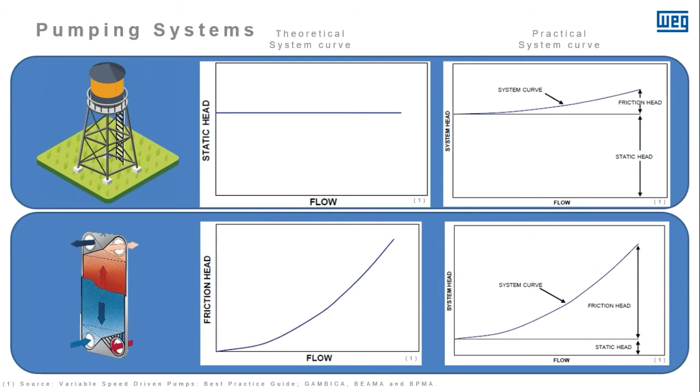And for a pumping system to work, we need to overcome the total system head of the system. And how do we do that? We do this with pumps. So I'm not going extensively here talking about pumps, but pumps are mainly divided into dynamic pumps or displacement pumps.

Dynamic pumps, there are also two groups: rotodynamic pumps, where we have the centrifugal pumps that we know a lot, but they also have some axial pumps and a mix of both. And of course, there are single-stage and multi-stage pumps, but we're not going into all these divisions. We also have special effect pumps that we call jet pumps or eductors.

And then we have displacement pumps, where we have reciprocating movements with plungers, pistons, or even diaphragm pumps. And then we have rotary pumps: progressive cavity for oil pumping, screw, gear, lobe, vane, peristaltic. We have a lot of variations.

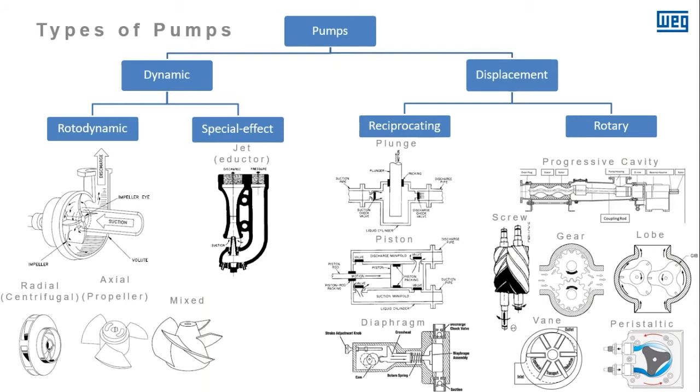Okay, talking about pumps and a little bit of differentiation between them. Let's just generalize here. We have centrifugal pumps, where usually we have this pump curve, with the head and flow graph here. The pump curve will look like this. And then we also have the diaphragm pump, a positive displacement pump, where we have head and flow like this.

Usually we also have this graph turned, with the flow on the y-axis and the head on the x-axis. But here for comparison, we will have it this way. In a pumping system, we will have the system curve and also the pump curve. Where those two curves intersect each other, we have the operating point of the pumping system.

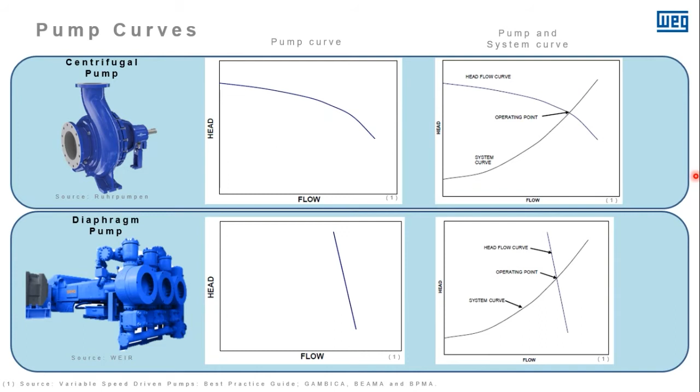Let's go to the life cycle cost analysis of a typical pumping system. I'm making an assumption here that we have possibly three types of people watching this webinar. We have the curious ones that are here just for the knowledge, we possibly have someone here with pumping systems with a lot of costs, and we possibly have someone here that works with pumps and perhaps wants a more economic solution to offer to their customers.

So let's analyze the life cycle cost of a total pumping system. Pumping systems usually work for 15 to 20 years. So initial costs are not a big part of the total costs. What we have mostly is energy costs during this life cycle. And we also have another big part here, which is maintenance costs, repair costs, and everything related to this.

So taking this into consideration, we should properly design the system in the beginning, perhaps investing a little bit more in the beginning to save more energy and to save on maintenance. So due to this, I'm going to divide this webinar into two main parts: the energy improvements and also the performance improvements that can help with maintenance.

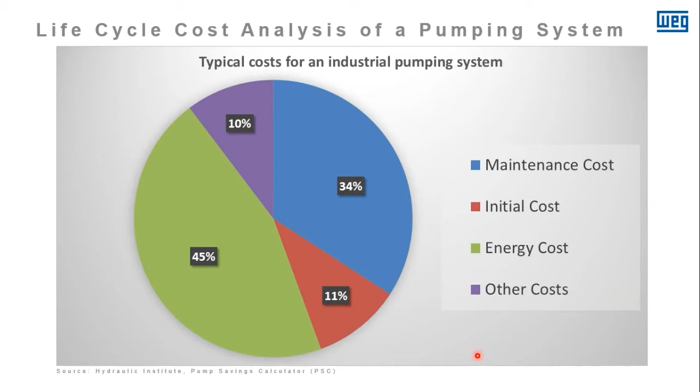Energy improvements are the most visible improvements that we can have in a pumping system by using variable speed drives. They are very tangible, and it's also easy to calculate how much you can save in energy by using variable speed drives, and that's why people mostly think of a variable speed drive as saving energy.

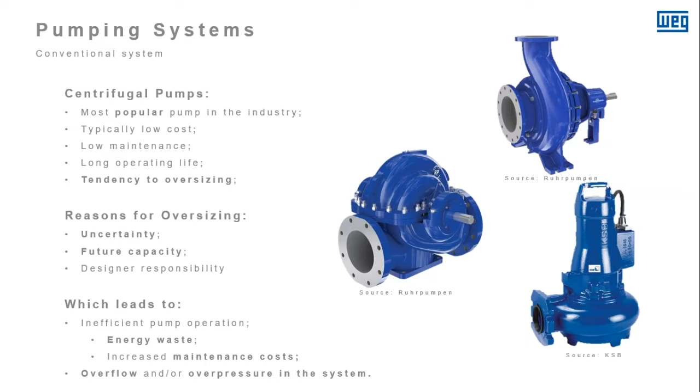So considering that centrifugal pumps are the most popular pumps in the industry, and that they have low cost, low maintenance, long operating life, and usually a tendency to be oversized, we face some problems here. Reasons for oversizing centrifugal pumps: the designers usually have uncertainty about how the system curve will be in the final assembly of the system. That's why you have to oversize the pumps a little bit. Sometimes you also consider some future capacity in the system.

And as the designers are responsible for this performance and have to endure the uncertainties of the system, they tend to oversize centrifugal pumps and other pumps as well, which leads to inefficient pump operation at the operating point. That leads to energy waste and increased maintenance cost. It also leads to overflow or overpressure in the system. And to control this in a conventional system, we use either bypass valves or throttle valves.

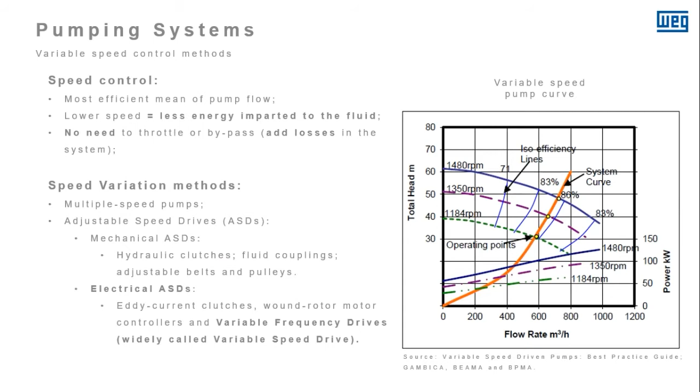Let's get into the variable speed drive. How does a variable speed drive work and how can it help in varying speed in a pumping system? So a variable speed drive is composed of three main parts. We have the rectifier bridge at the input, mostly a 6-diode rectifier bridge. We have the DC link with the DC capacitors, and we have the inverter part with the IGBTs.

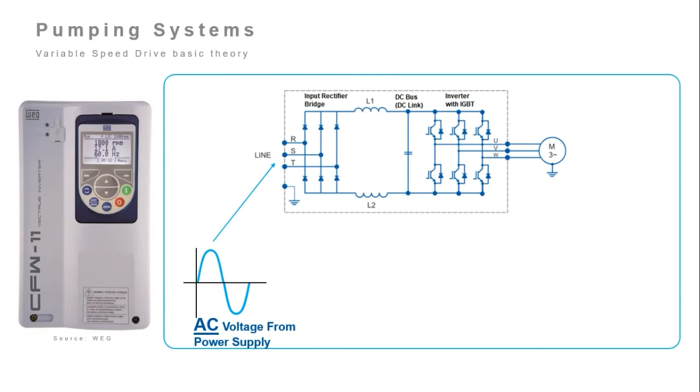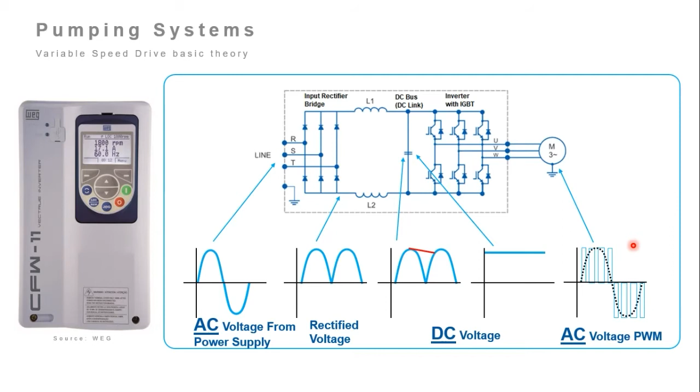So to start, we have the AC power supply going to the rectifier bridge. Then we rectify this, and also we have the capacitors to smooth this energy in this DC link. So having this DC voltage in the link, we can use the IGBTs to switch this energy and create a sinusoidal wave at the output. Variable speed drives consider a voltage by frequency curve always constant, which leads to constant torque in the motor. And by varying the frequency of this sinusoidal wave at the output, we can vary motor speed, always keeping the pumping system at the best efficiency point.

Another important point to mention is that the variable speed drive will usually control a pumping system automatically by using a PID controller. We can always monitor the process variable, which can be flow, pressure, or another variable. And then we can set a control point in the system. And by adding proportional, integral, and derivative gains, we adjust the output of the drive, consequently the motor and the pump, to change the speed and change the process variable.

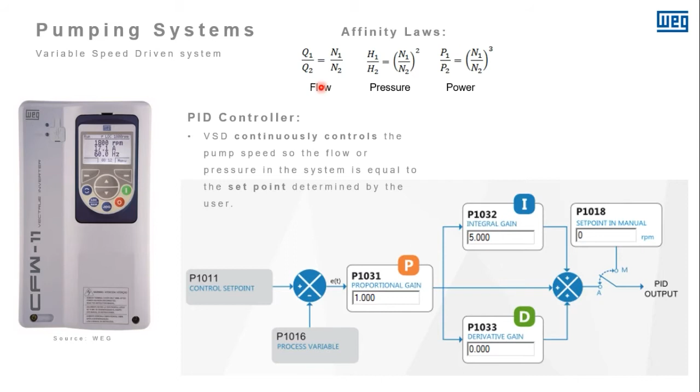This has a great impact on energy, because rotodynamic pumps follow the affinity laws, which means the flow is directly proportional to the speed of the pump, pressure is proportional to the square of the speed, and power is proportional to the cube of the speed. Imagine a pumping system for municipal water where at night you don't have to run at 100% flow, you just need 80% flow. This means that for those 8 hours at night you can save almost half of the energy that you would waste having to throttle or even bypass. So this is the most efficient way to do this.

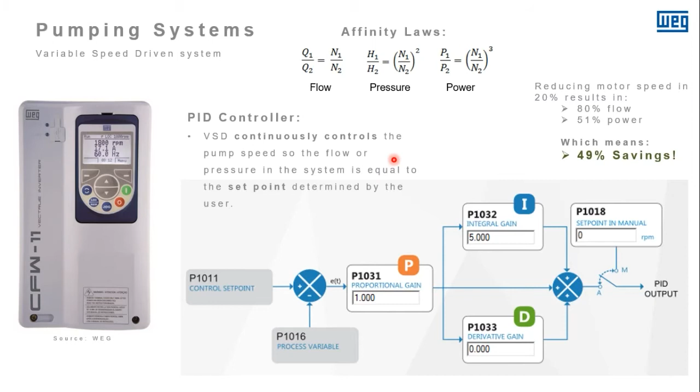Also, in low demand periods, the variable speed drive can use only one auxiliary pump, a jockey pump. You can set it to use a jockey pump instead of the main pump. And if the demand is too low, you can even put the motor and the pump to sleep and not waste any energy at all until the process variable requires it.

There are other improvements that a variable speed drive can provide to a system. They are often neglected because they are hard to calculate, unlike energy savings, where you can make some calculations. But we have a lot of performance improvements to provide to pumping systems with variable speed drives. To start, wear and tear on the equipment. All equipment in the pumping system is susceptible to wear and tear. Let's take into consideration the main parts I selected here.

Valves. Valves are susceptible to wear and tear, and this can lead to leakages and also require constant maintenance. A leakage is a little bit normal if it's slow and small in pumps or valves, but a huge leakage can lead to problems. Also, valves are always susceptible to overhauls. So controlling the pumping system by valves can add maintenance and constant overhauls to your system.

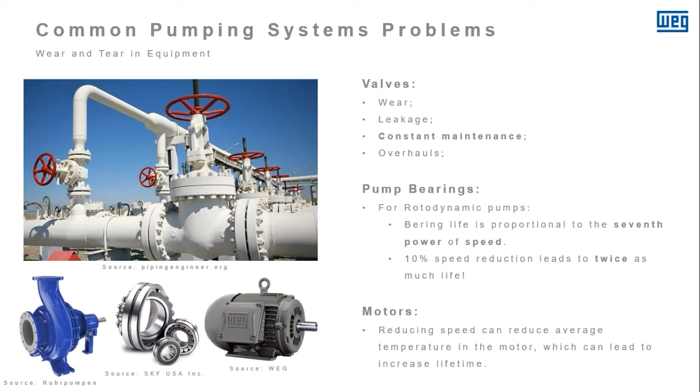So speed reduction whenever it's possible is something that we can do with variable speed drives. With the PID controller, whenever you don't require to have much pressure or flow into the system, the variable speed drive will reduce the speed and avoid all those problems.

Also, in a VSD system, we can switch operation in between the pumps to equalize the wear and tear of the pumps. So it can keep monitoring the pumps and see how many hours each is working, so we can keep switching from one pump to another.

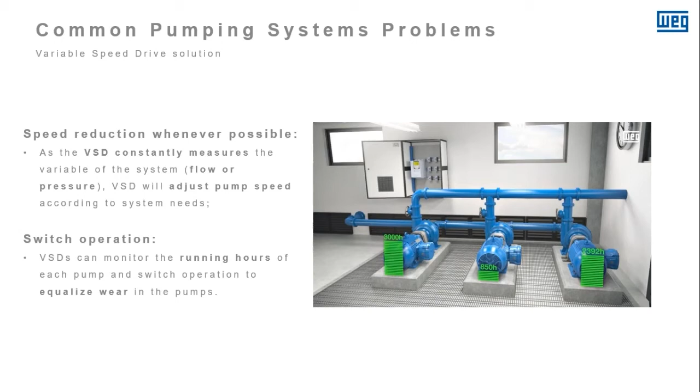Other common problems in pumping systems are water hammers that can lead to broken pipes and leakages. The water hammer effect is based on Newton's second law of motion, the conservation of momentum, that says that if a fluid is moving through a pipe and you tend to decelerate that fluid or even accelerate it, there will be a force. So imagine a pipe full of water running at 10 meters per second.

If you try to stop that, there will be a huge force in the system that can lead to spikes in the pressure in the system, either low pressure or high pressure, that can break the pipe or implode the pipe. This can lead to broken pipes, not only by water hammer, but broken pipes can happen from high pressure of, for example, trying to strangle a flow of a pumping system with a displacement pump, which can lead to a higher pressure in the system.

And this all can happen and break your pipe, your pumps and valves and other equipment in the system. And leakages are also a very huge problem in pumping systems. They can be simple leakages, leakages of clean water and normal fluids, or they can be toxic leakages in a wastewater treatment facility where you cannot have leakages of this water.

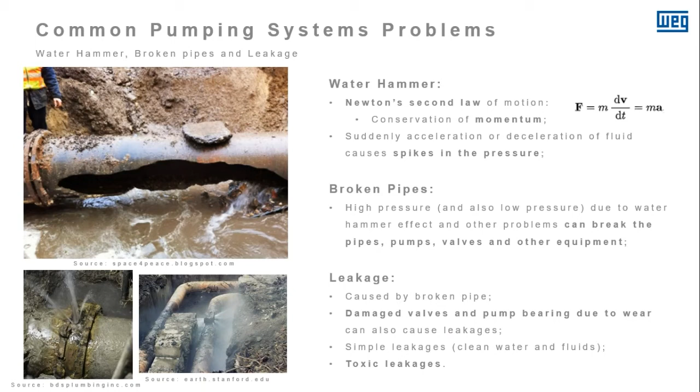The variable speed drive can present many functionalities to assist in this and avoid all those problems. For example, it can help with smooth pump start and stop. So you can set some curves to start this pump slowly and smoothly to avoid the water hammer effect, and also decreasing the speed of the pump at the same rate, so avoiding water hammer.

And we can also have some broken and clogged pipe detection. By monitoring some variables in the process, we can see if the pressure is too high, and we can act to decrease this pressure or either shut off the valve or the pipe, the pump and the motor.

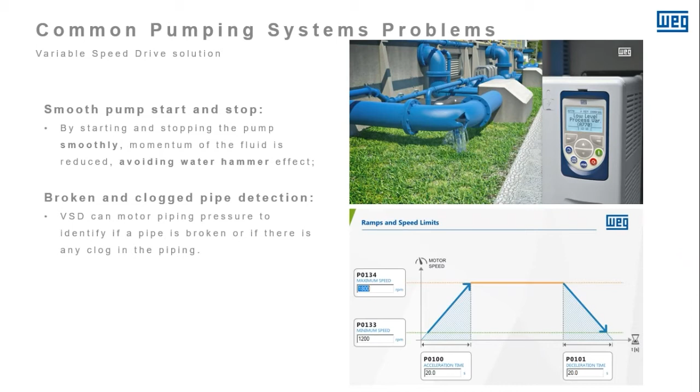Another huge problem, most common in rotodynamic pumps, centrifugal pumps, are cavitation, internal recirculation, and for other pumps, dry running. So cavitation is a condition that happens at low pressure in the input of the pump and at a certain temperature. It can lead the fluid to reach its vapor temperature, and then it can create some tiny bubbles of vapor in the system.

These tiny bubbles, as soon as they try to leave the impeller, as the pressure will be increased, will be exploding, causing high velocity jets of water that can erode both the impeller and the pump volute, and this can lead to lower efficiency in the pump.

Other problems, sometimes people don't speak about it, is internal recirculation. When you're running at low flow rate conditions, some parts of this fluid don't have enough energy to leave the pump, and it tends to recirculate inside the pump, which can also lead to erosion. And many pumps cannot dry run, and this can be a problem, can damage the pump, can even break the pump, and you can have to perform some maintenance.

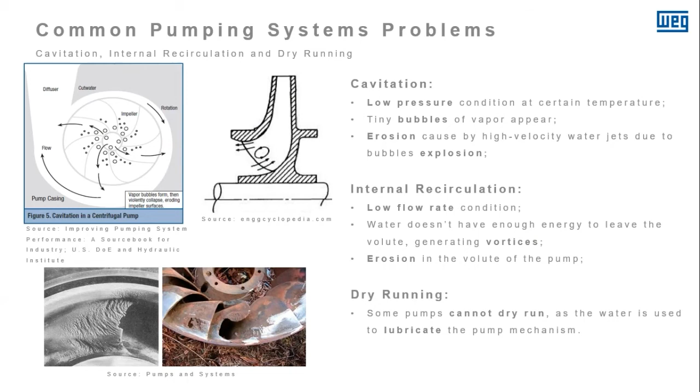To solve all of these, variable speed drives can present some protections. For example, variable speed drives can have anti-cavitation protection. It can analyze the input of the pump and check if the conditions of cavitation are appearing, so we can decrease the pump speed. Also, you can set some flow limits in the variable speed drive, and it can keep measuring the flow.

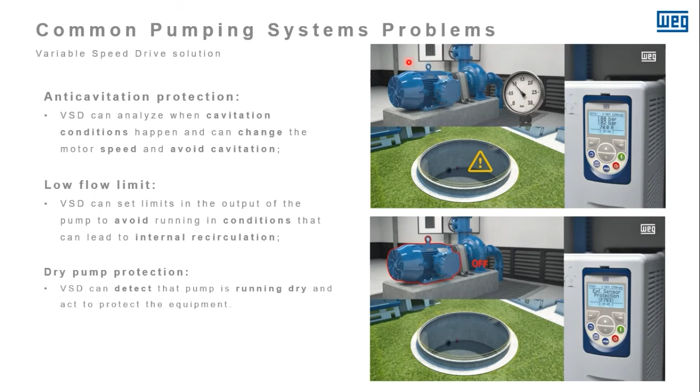You can limit the flow either at a low level or a high level. And also, you can set some dry pump protections into the variable speed drive. It can be done either sensorlessly or also with some sensors.

Another problem in pumping systems, mostly in wastewater treatment plants, is pump ragging and pump clogs. Pump ragging can happen when improper disposal into the system occurs. You have some rags or even very fibrous materials in the system that can start to accumulate in the pump impellers and can either clog the pump completely or just decrease the efficiency of the pump by having some rags in the impeller.

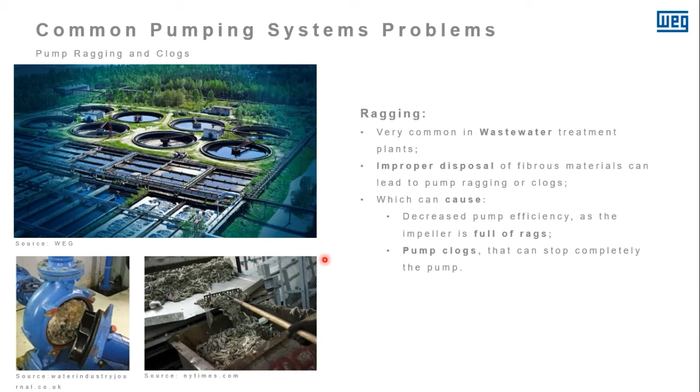Also, variable speed drives can perform a deragging sequence on the pump by rotating backwards and forwards and trying to take off all those rags. And this can clean the impeller and restore the pump efficiency.

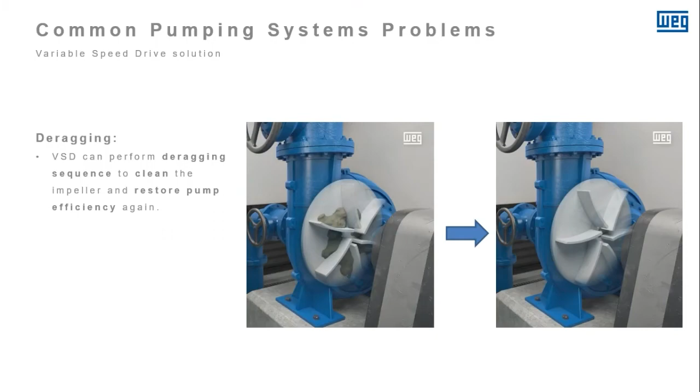Let's go to a solution that can help you all. So, for example, here I would like to show you a small video about the solution that we have here at WEG.

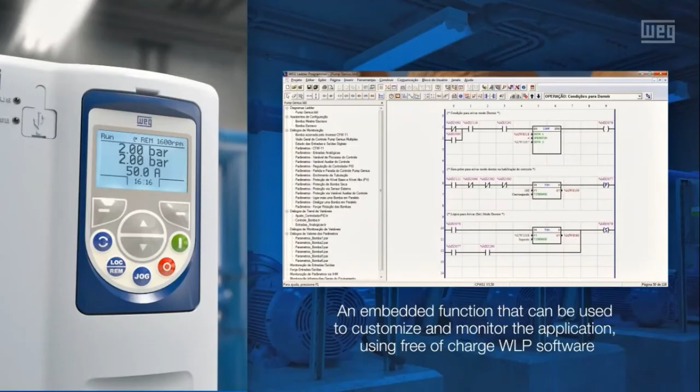Okay, that was the video. Guys, before we go forward, do you have any questions about the energy improvements that I presented and also the performance improvements, or even about some problems that happen with pumping systems? Please put these questions into the chat. We will try to answer you and also try to answer here live after the end of the presentation as well.

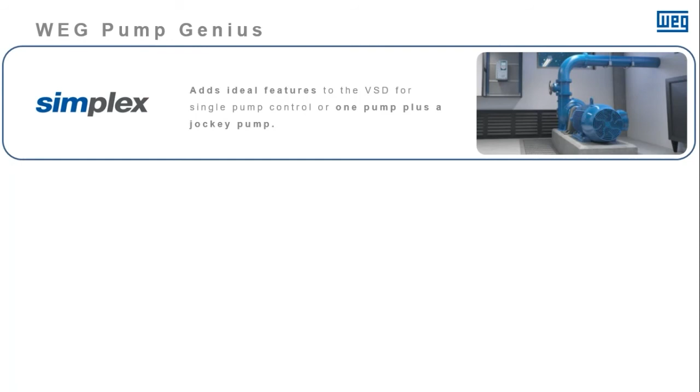Okay, going back to WEG Pump Genius, we have three modes as explained in the video. We have the simplex mode, which adds ideal features to variable speed systems with one pump or one pump and a jockey pump for low demand periods.

There is also the multi-pump system, the best choice for cost-effective solutions, where we can work with up to 5 pumps working via direct online start, soft starter, or other starting methods, and one pump being controlled by the variable speed drive. And for more accurate control of flow and pressure, the most complete solution is the multiplex solution.

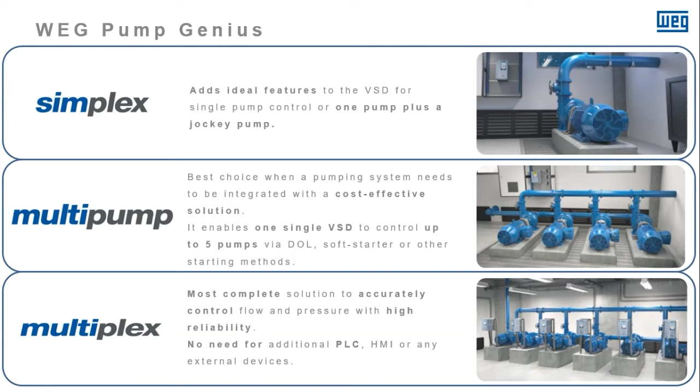In this type of solution, we have one variable speed drive for every pump, and there is no need for any additional PLC, HMI, or any other devices, which can save you a lot of costs. The Pump Genius that we are explaining here is free software available for WEG variable speed drives, and it can solve all those pumping problems that you can have in a pumping system, and also can lead to an improved system with less energy waste and less maintenance or other costs.

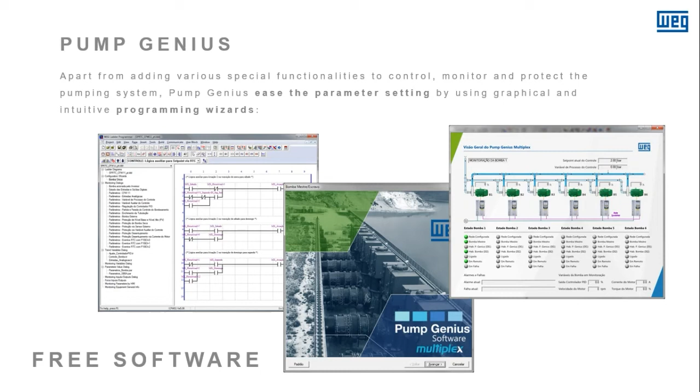It is a very user-friendly program that we have here, the WLP. We use this program to do the parameter setting of the drives and the Pump Genius software. And in this last part of this webinar, I'm going to share a training suitcase that I have, and I'm going to do the parameter setting of three functionalities from start to end, just to simulate how easy it is to use this program and how the programming wizards work.

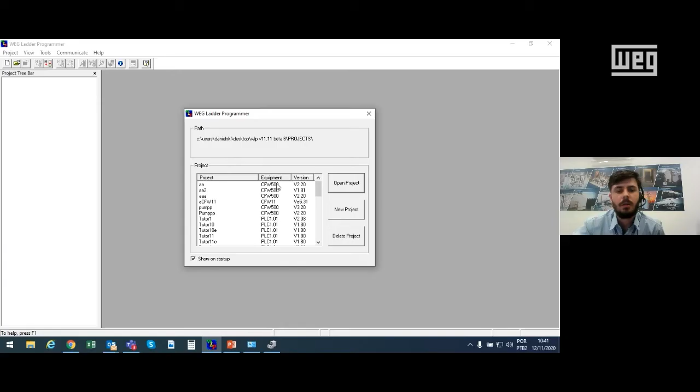I also have in the presentation how you can get this program from our website, but let's go to the training suitcase so I can show you how we can do this. Let's open the WLP program. Once we can, we'll put the training suitcase here on the camera. I'm turning it on. Let's create a new project from the start. Let's write down pump 1. Let's go for the CFW 500, the one I have here.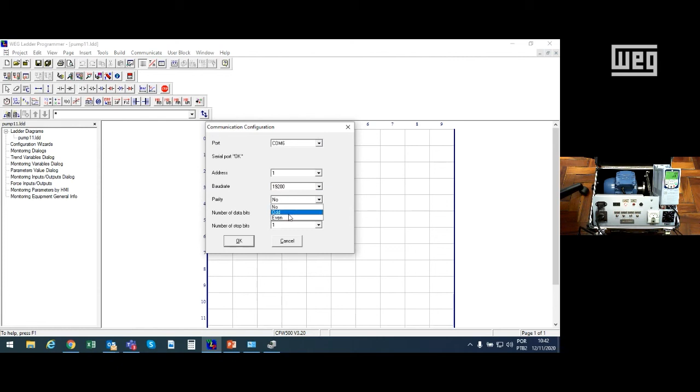To start, I'm on the camera here. Let's put on the auxiliary webcam. All right, now you can see the training suitcase. Okay, you probably can see my screen as well. I'm connecting the drive to the serial port. I think we have established communication. Let me just check if I am on the right port, communication 6. Okay, all right.

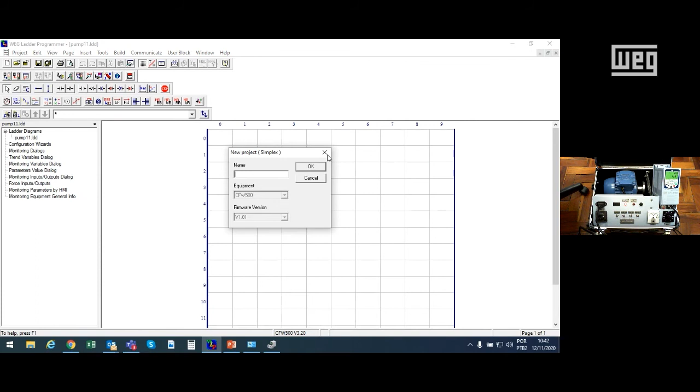First of all, we need to open the complete program here, Pump Genius. Let's do the simplex. Let's name it pump simplex. Okay, there will be a lot of screens here that I'm going to skip. We don't have time to read them all, but when you're doing it on your own, I advise you to read them all.

To start, let's download this program. We have all this ladder programming here in the software. We need to put this into the drive. Okay. Let me connect again. Communication 6. Okay, let's put the programming into the drive. Compile. Okay.

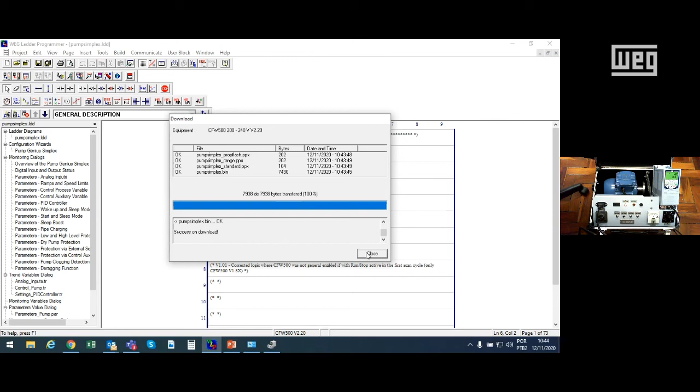So I'll put all this programming into the drive, and then we can start playing with it. As I was saying, I'm going to present 3 functionalities, one at a time, because I don't have the dynamics of a complete pumping system here. I'm just having an analog input. So I will test them one at a time, but in a pumping system, you will be running with all protections at the same time.

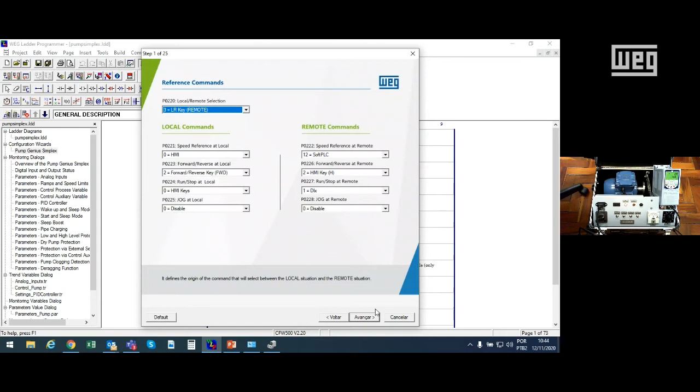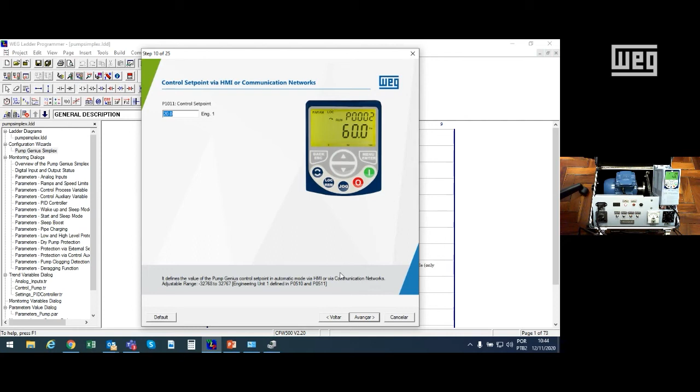Okay, now the drive already has the programming there. We will then start to work with the wizards. Again, not going through all these wizards here. You can set the ramps to start and stop. We can set the PID controller here, but let's go straight to dry pump. First I want to disable the other functionalities here by putting 0, so we can see how the dry running will work. I don't want pipe charging. I don't want low level and high level right now. Let's go just for the dry pump.

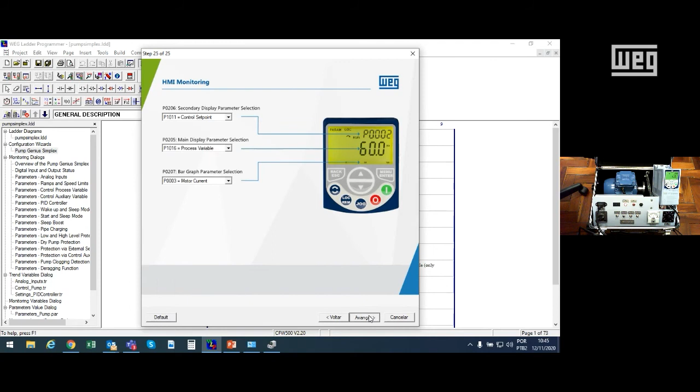How does the dry pump functionality work? It detects that the pump is running at full speed, or we have a 60 hertz motor here, at very high speed. And if the motor torque is very low, it means that we don't have water in the system. The standard value is 20, but for this training case, I'm going to put 15. Let's not forget the time here for the protection to work. The others we don't need to change. These are all the parameters we set in the wizards. Let's send these to the drive.

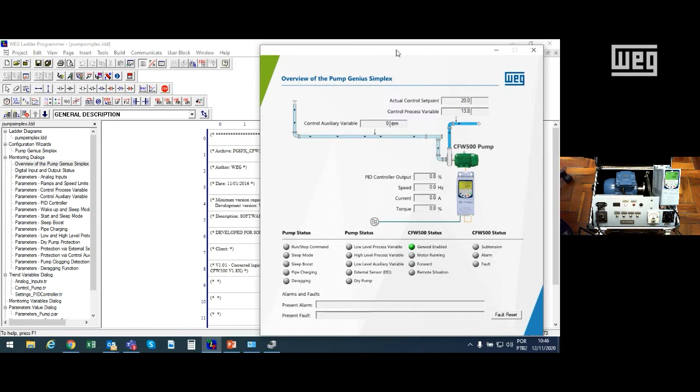Okay, drive has everything now. Let's open some monitoring screens so we can see what's going on. Here in the training bench, it's a little bit small, but you can see in the drive we have the set point, it's 20, the set point for the process variable. So this is the control set point, this is the process variable in the big number. And by changing the analog input here, I change the process variable.

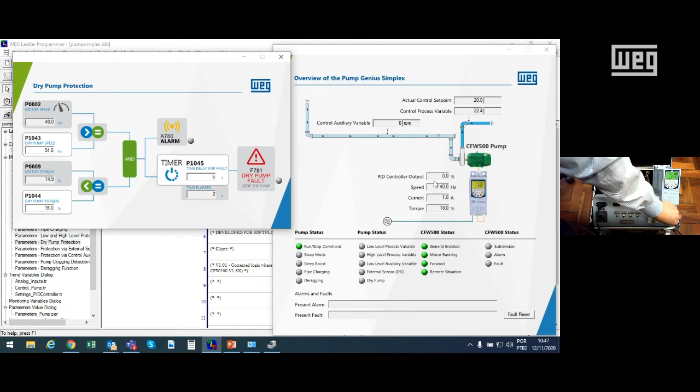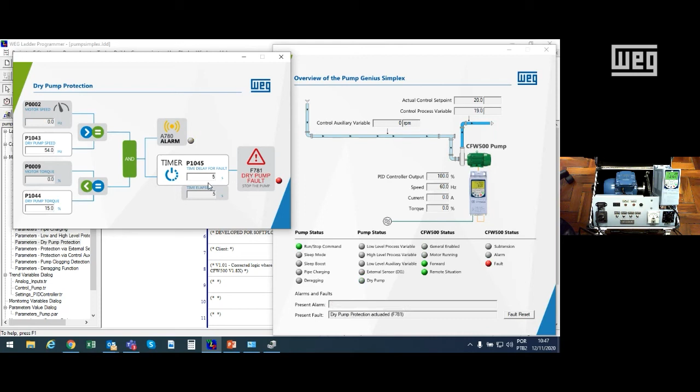I have some digital inputs here to simulate starting and stopping the motor. Let's start the motor and see what happens. In the screen you can see the motor speed is increasing. We are below the control set point, so the PID controller is running and we will go at full speed. Let's simulate first this one. We are above the set point, so the motor is running at minimum speed. But if we go below the set point, we need to reach the control set point of 20, and the pump starts to speed up. Once we go over 54 hertz and the torque goes below 15, the counter starts to count to 5. Then the fault happens.

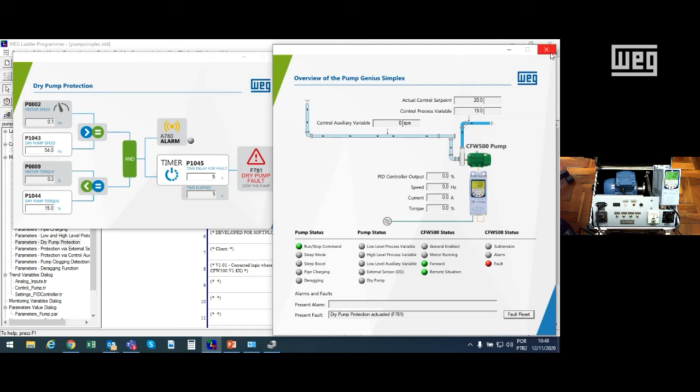Let's do it one more time. Motor is speeding up. The dry pump speed that we set is here, 54. Motor torque is here. We are below the control set point, and then torque is low, no water in the pipe, so the protection happens and leaves you with no problems from dry running. So this is one functionality I would like to show. Let me turn off the drive and let's try the others.

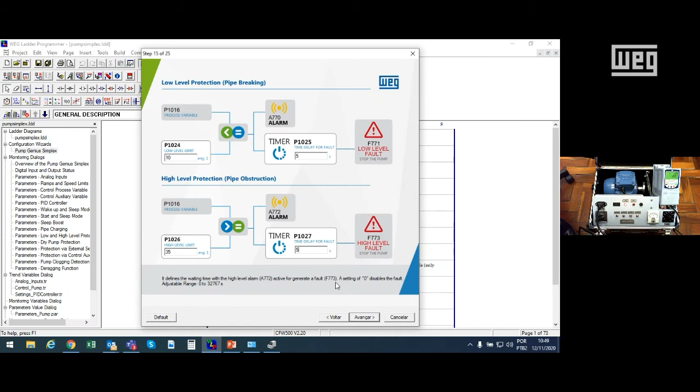First, let's disable the dry pump by putting 0. Let's try low level and high level here. Low level and high level depend on what process variable you are reading. It can mean pipe clog or even broken pipe if you're measuring pressure or flow. So let's put protection that will occur in 5 seconds, and let's send this all again to the drive.

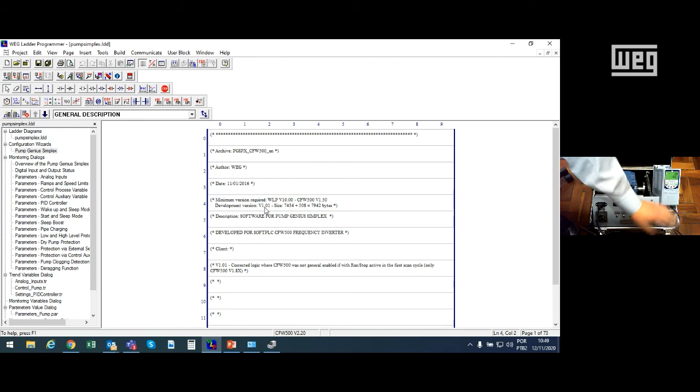Okay, control set point is 20. We have low level at 10 and high level at 35. The maximum that we can put here is 40. Let's start the drive. We are above the low level and below the high level. Nothing happens. Motor is going to speed, and we are trying to reach the control set point by speeding up the motor at full speed. This is the PID controller happening. Let's open the monitoring screens for low level and high level as well.

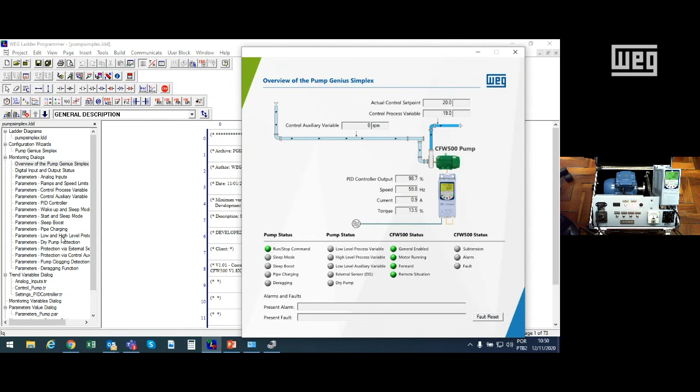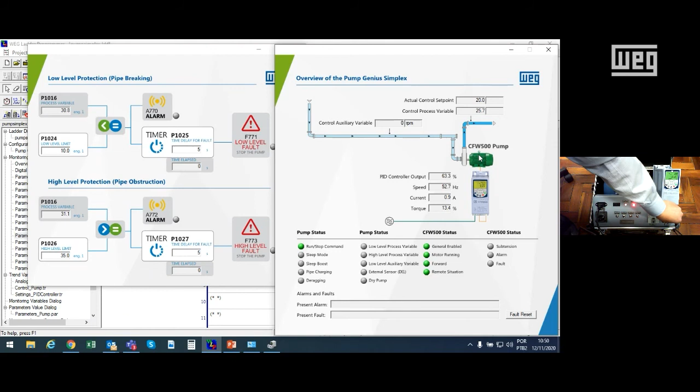Okay, motor is speeding up. There is some clog in the pipe. It tries to slow the motor and the pump, but the pressure is still rising. So it counts to 5 and then shuts off the drive, the motor, and the pump. Let's try it again. Motor is speeding up. Still not high enough for the high level to occur. Let's go above 35. As you can see, an alarm first, and then a drive fault to indicate high level and possible clog in the pipe.

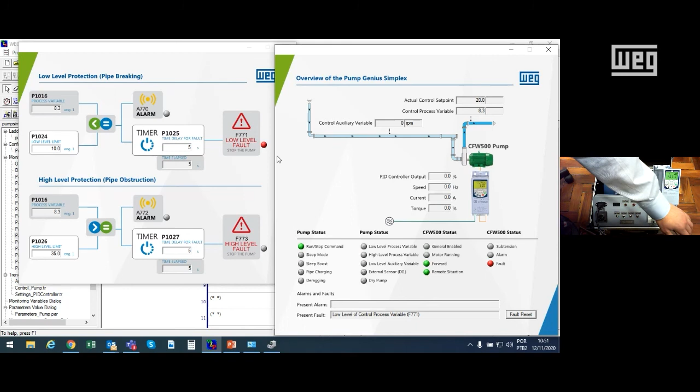Okay, let's reset the fault now and do the low level. We can also check the variable here. Motor is speeding up, trying to hit the control set point of 20, and the PID controller is working. If we go below 10, below the low level, that can lead to internal recirculation in the pump and cause some erosion. We don't want that. So it shuts down the drive because some problem probably happened. Let's do it one more time. Motor is speeding up.

Let's go below the set point. Perhaps we are measuring pressure here and the pipe is broken and we don't reach that low level, and then a fault occurs to indicate this broken pipe. And to finish, let me shut off the motor here.

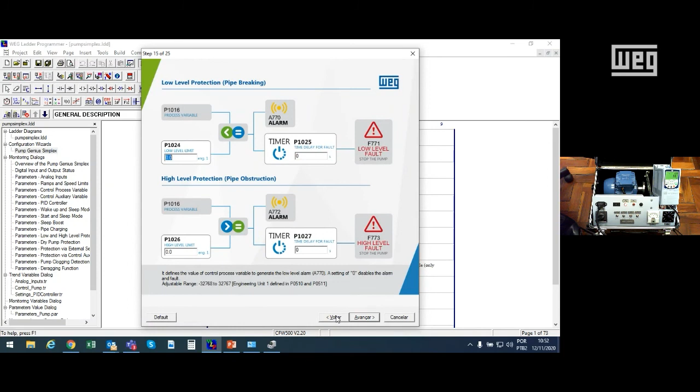So to finish, let's do the last one. I saved the sleep and wake up mode to do as the last functionality. First, let's disable the low level and high level protection. And let's go back and do the sleep mode and wake up mode.

So sleep mode will happen in the following situation. If the PID controller is working and you go at a very low speed for too much time, let's say 5 seconds. The lower speed in this system we set to be 40, so 42 is very low. And if the motor speed goes below 42 Hertz for 5 seconds, it will put the system to sleep.

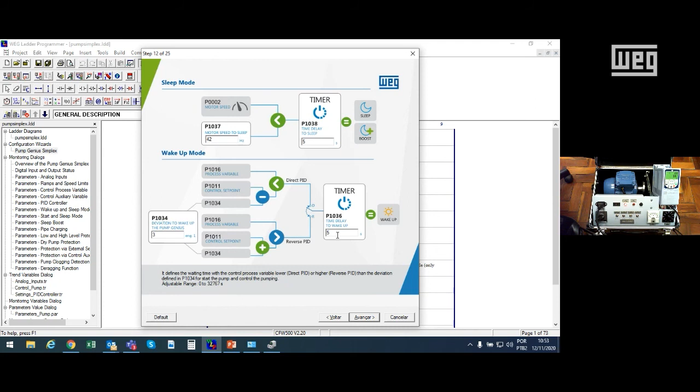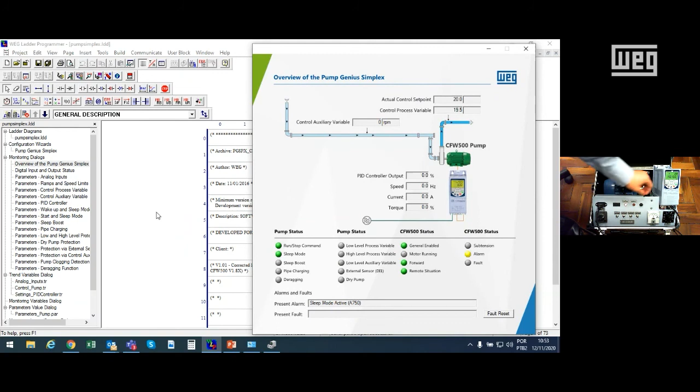And how to wake up the system again? If we drop by 3 points the set point of pressure or flow that we set, that is 20, the system will count to 5 and then wake up the motor again. Let's see how this works. Okay, let's put the control set point here. Let's open here. I see an alarm. Okay, we need to drop 3 points to start the process.

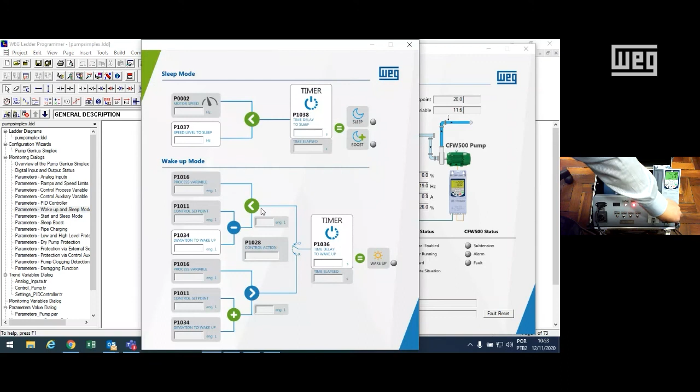System is running at full speed, so let's think that the process variable goes over 20. That is our set point. Imagine at night in a municipal water treatment system, fewer people are getting water from the pipes, and then the set point goes below 20, motor starts to slow down, and as we go below 42 hertz for 5 seconds,

it goes to sleep. If we decrease the process variable by 3 points, as we said, so now 16, it starts to count to 5, and then wakes up the motor again. You see the motor starts running again. You can see also here the speed of the motor. Let's make it go to sleep again.

PID controller is working, so motor speed is decreasing. Process variable is above the set point, so speed is decreasing. And once it goes below 42, it will count to 5. The counter is starting again, and then it goes to sleep. Let's drop the process variable a bit and see the motor waking up automatically again. Yeah, that's it. It's all done on the training bench.

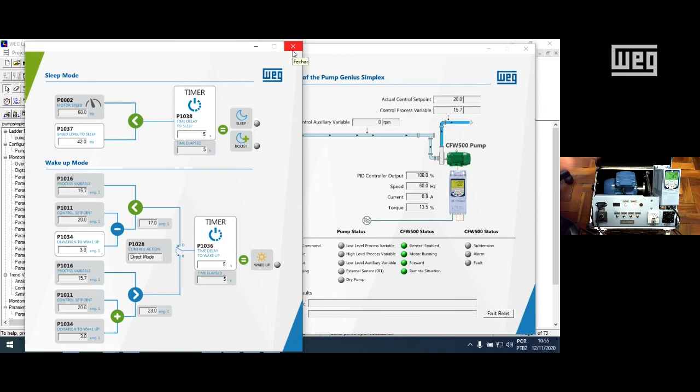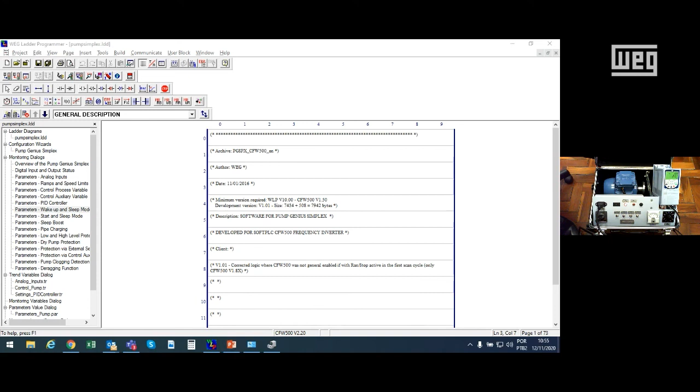Okay, let's go back here to the presentation. All right, so how do I use the Pump Genius? I'm going to share this presentation with you in a WeTransfer link, so you can have this material and look again if you have any questions. Here you will see how you can get the WLP program and how to access the Pump Genius.

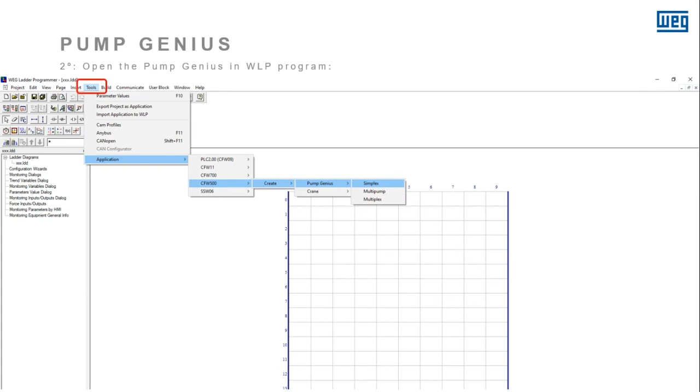Also, in automation, we have many divisions. We have the drives division covering soft starters and variable speed drives. We have the controls division: circuit breakers, control signaling, motor starters. We have machinery safety, building and infrastructure, critical power, electric panels, solar energy, electric mobility, and also digital business.

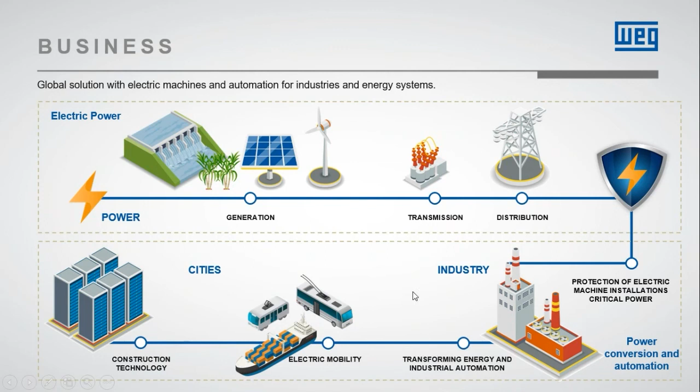And by having all these types of products, WEG is in the complete electric system: generating the power, transmitting this power, usage in industry, electric mobility, and construction technology. Also, we have a huge global presence. We have more than 30,000 employees worldwide, and 45 manufacturing sites in 12 countries. We have commercial operations in 36 countries, distributors and agents in 120 countries, and sales in 125 countries.